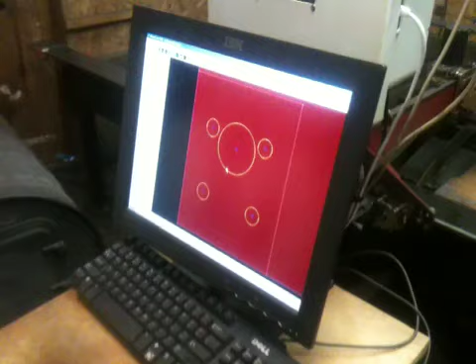There, I brought the DXF file in, right? So then I wanted to create code. I would go here. I would say, okay, I want the outside offset, so that means I'm going to cut out here and it's going to account for the kerf right here, 0.06 inch kerf. Okay. I want to move at 50 inches per minute, which for this one I would do like 25. It's recommended 30, but I like to do

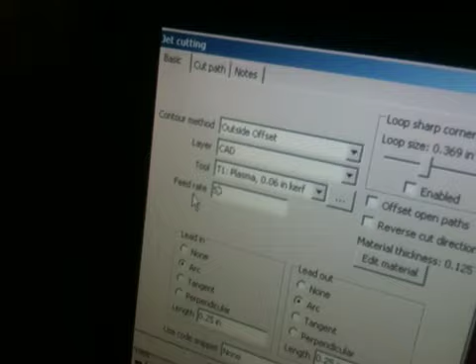a little slow. Yeah. I don't ever use this SheetCam. Anyways. Okay. This is an old computer down here. There you go. My num lock was off.

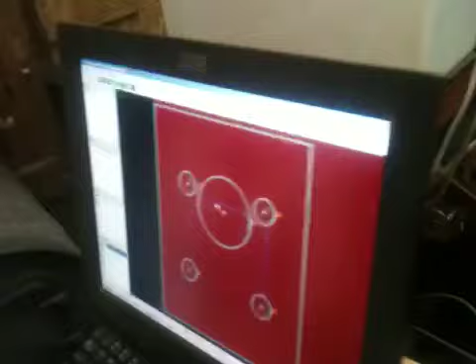I can do my lead-ins. I can do arc, none, tangent, perpendicular. I can select how long they are. You select the pierce points. How do you do that? So I'll click OK, and it'll create the G code right there, right? And if I want to move the pierce points, like say this one's on the corner, I go up here to start, edit start points, and I can select that. There. Oh, so you can select the toolpath however you like.

Yeah, and say this one. So you didn't like how it does it automatically first? Yeah, it does it automatically first, and it optimizes it for the less distance traveled. So say I wanted it up at this corner because I had another part down here. Say I didn't want to use those. I right click, I go to properties, I unselect that, and then I can change them to tangents or perpendiculars. And so that's the lead-in, and the lead-out will do a tangent.

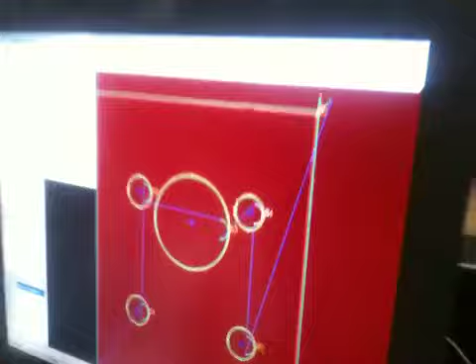So it changes it. So I see you always want to pierce a little inside and go into it, yeah? Yeah. For the most straight cut, you want to start and end up away from it. You can do the actual none cut, you know, and you'll have no lead-in or no lead-out. Lead-outs on holes like this I like to shorten, because that plug will fall out long before the lead-out. Right when you get here, that plug's going to fall out, and so it's going to continue to travel around that lead-out right there until...

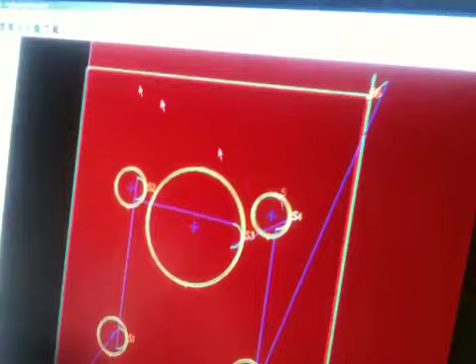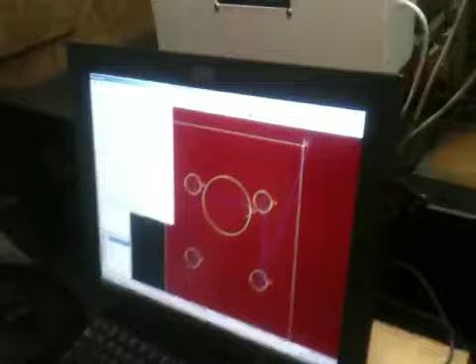Okay. So lead-ins, lead-outs. For pierce time, do you select that? Yep. You do that uniform throughout, in the tools right here. So you got pierce delay. You can set your kerf width, your feed rate, your pierce delay, your pierce height, your plunge rate, which is after that pierce delay goes through, it'll plunge down, and your cut height, what the target height is off the material. Once that happens, 1 second after the cut starts, the torch height control takes over. And then it does what it needs to.

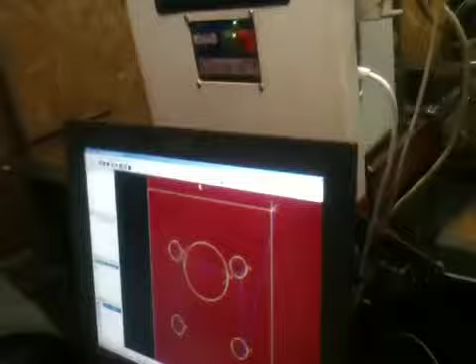How do you select that, so that you can select when it comes in? Yeah, but that's in the CAM. So here we got this, the CAM software. This creates the G code. Once we have that G code, I go here to Mach 3. Mach 3 interprets the G code and tells the machine what to do. So you have 3 softwares: CAD, CAM, and your Mach 3, which is your controller. Okay.